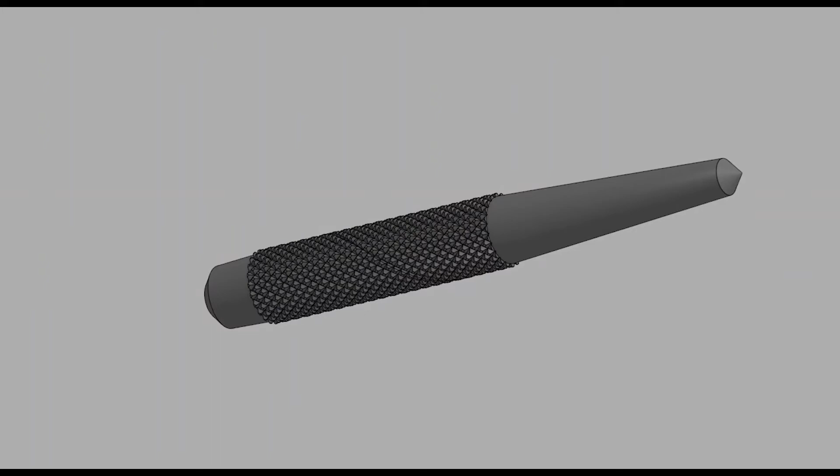In this tutorial, we're going to draw the main component of our center punch using surface modeling. All right, so let's just sign into Onshape, making sure you're using your education email. And the first thing we're going to do is create a new document.

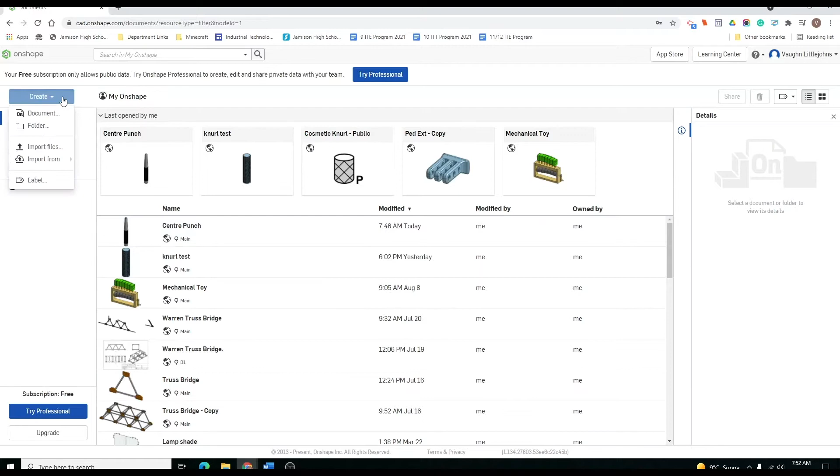So as you can see, I've got all my existing designs here. I want to go up to the top left, click this create document, and then name it center punch, create public document. Now this is our workplace surface, so where we're going to do our drawing. What we've got to do first is just double check our dimensions are set to metric.

So go up to the three lines up the top here, left click it, go to workspace units, and then double check that this is set to millimeters. And the rest is as follows, just like this. Once you're done, click the green tick and we're ready to go.

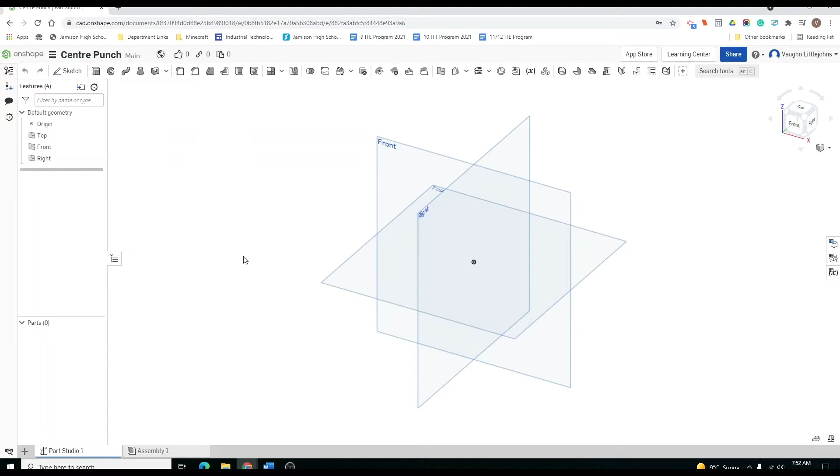So first thing is we're going to select the front view or front plane. So click that, go up to the top here and click the front view. So that just spins your camera around so you can see nice and clearly. First thing is you're going to click sketch. We're going to name this. Our first thing is we're going to create the profile of our center punch. So click the little pencil icon and I'm just going to say profile sketch.

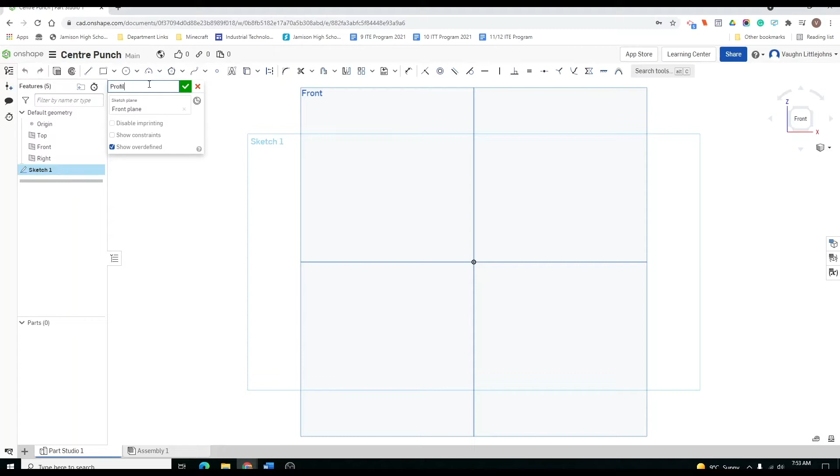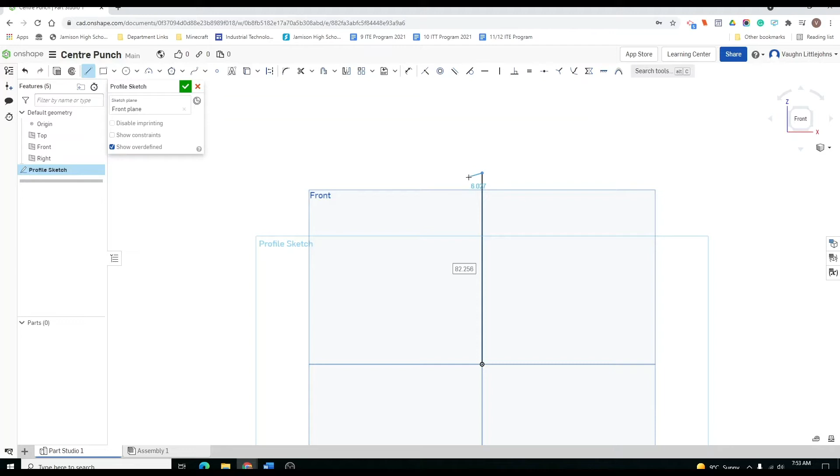All right, so next, click the line tool. We want to select the origin. So the origin is the center of these lines and center of your axis. And then I'm just going to go straight up and I'm going to type in 100. Now you don't have to click anything, you just type. As you can see, there's a little white box and it just automatically selects that. And then I'm going to hit escape. And as you can see, we've got our first line.

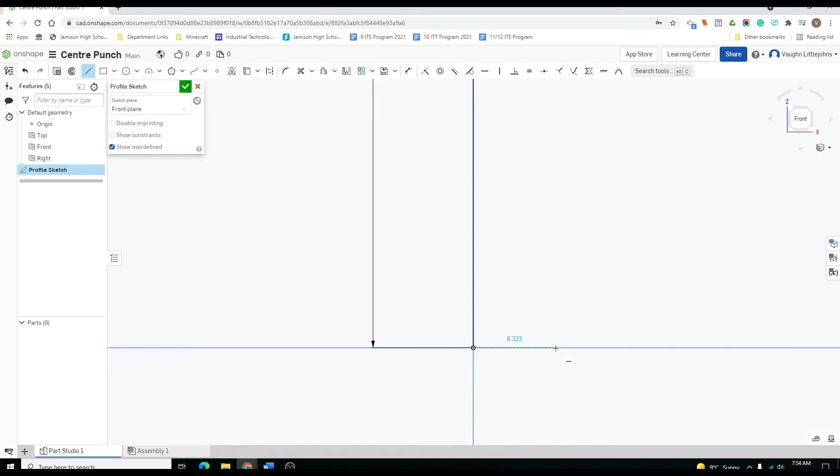So we're going to continue this. We're going to go down to the bottom here and we're going to just draw the next line. So zoom in, use your jog wheel. So that's the center wheel on your mouse. You can zoom into that point and click it once, drag along. When it's dotted, you can see that line is dotted, it means it's coming out at a 90-degree angle or it's dead straight. So we're going to click that and we're going to type in 5.

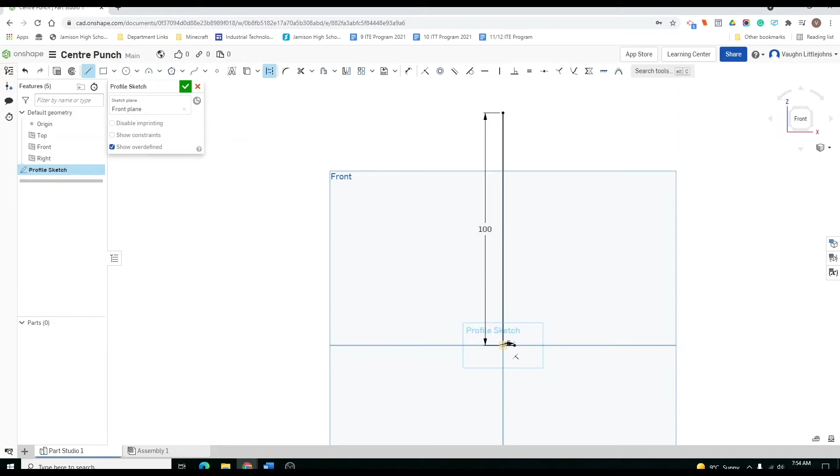All right, next we're going to put in a series of construction lines. So we're going to essentially draw the right-hand profile of our center punch. To start with, we're going to use the construction lines. Click the line, left click, and then click construction. So left click that as well. Go down to our bottom at that origin point, click up, and then you can't really see it, but there we go. I'll zoom in so you can see the numbers. We want to just type in 10. So that should be 10 millimeters up and you'll see a little dot.

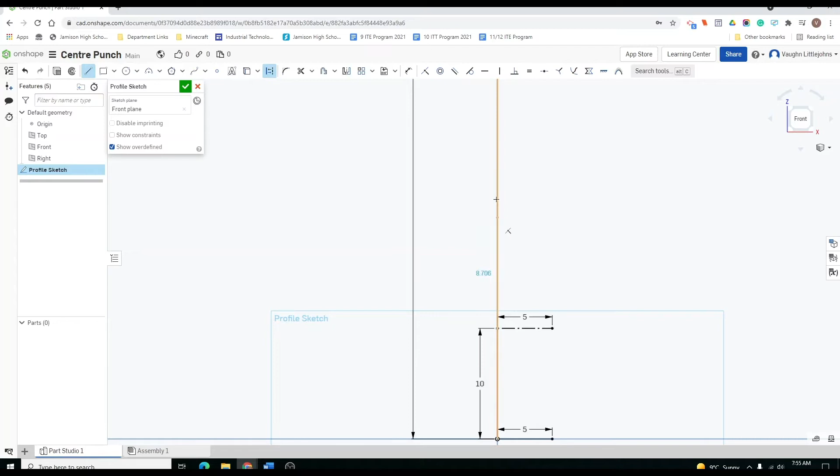What we want to do then is just go out to our right, 5. And I've just typed in 5, hit enter. I'm not clicking anything, I'm just typing away. Now I've just hit escape to deselect that line. The next thing we want to do is continue the construction line going straight up the center. So click line, left click construction. And then we're going to go from that 10 mil mark up.

Now, if you want to move your screen up like this, just click and hold your jog wheel in on your mouse. So we're going to come up directly on that line and we're going to click once and then type in 45 and hit enter. And as you can see, we've got our couple of dots just here.

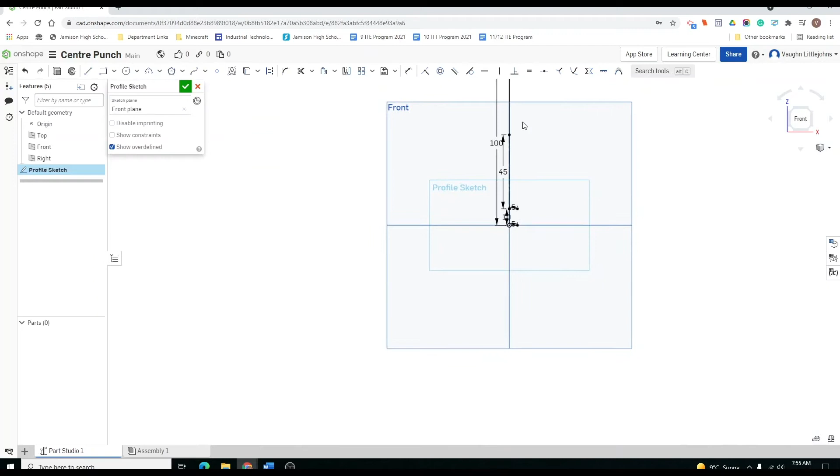And then the next one, we're going to zoom out, move our screen. So click and hold your jog wheel, zoom in, and then we're going to come down from there 3 millimeters using a construction line again. So select line, construction, click that dot, click again, and then just type in 3.

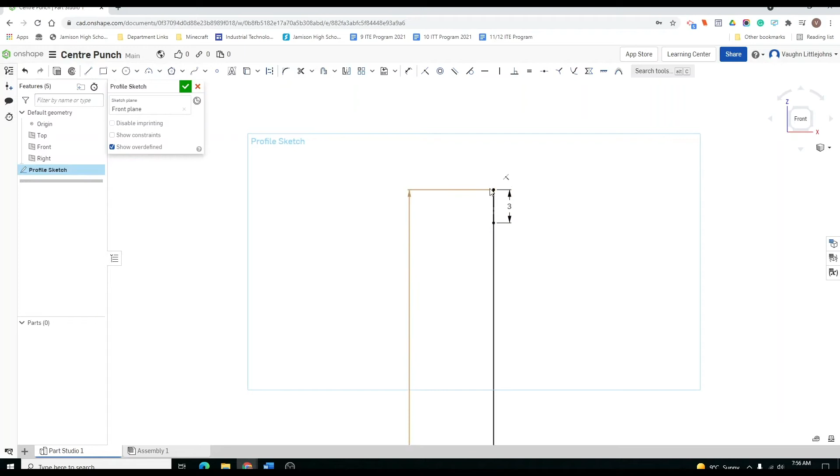Now we're going to have a 45-degree point. So the easiest way to make a 45-degree is just going out 3 millimeters off to our right. So click line and construction again. From that dot we just created, go straight across and type in 3. And there we go.

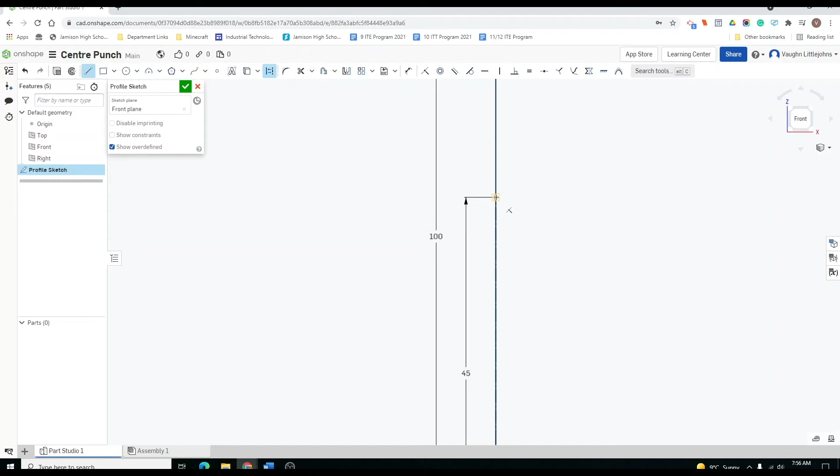All right, so now coming down to this line just here, what we're going to do is create a few lines within this. So construction or line construction, or you can go the other way, it doesn't really matter, as long as the 2 buttons are selected. From this mark here, which is the 45, click across, and the first one we're going to do is 6, because our total thickness is 12. So we're going to have a 6mm diameter because this is going to be round.

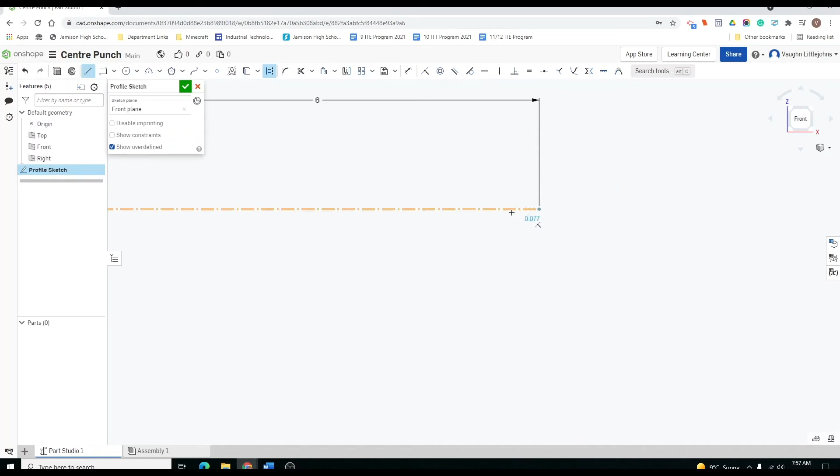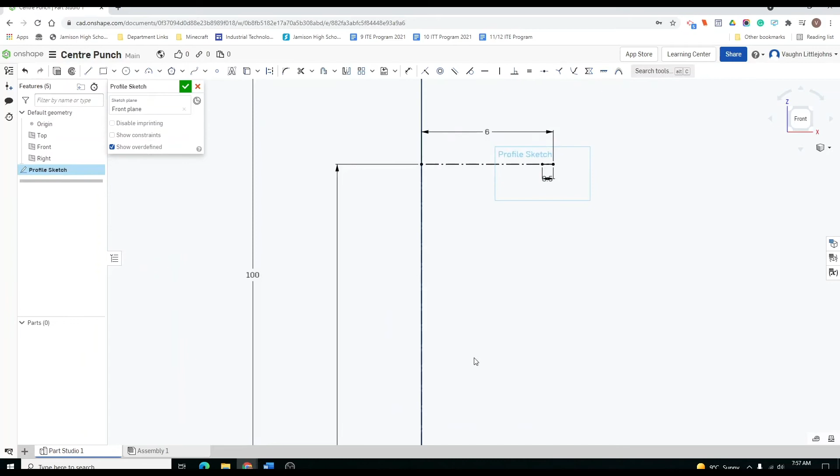Then from that point, as you can see, my line is still continuing. I'm just going to go back down that direction and type in 0.5mm. So that's just going to be a little lip on our actual profile. If you wanted to move these construction lines or the dimensions out of the way, you can just click and drag them so they're clearly visible. Click and hold your jog wheel until you can move and reorientate until we can come down to this line.

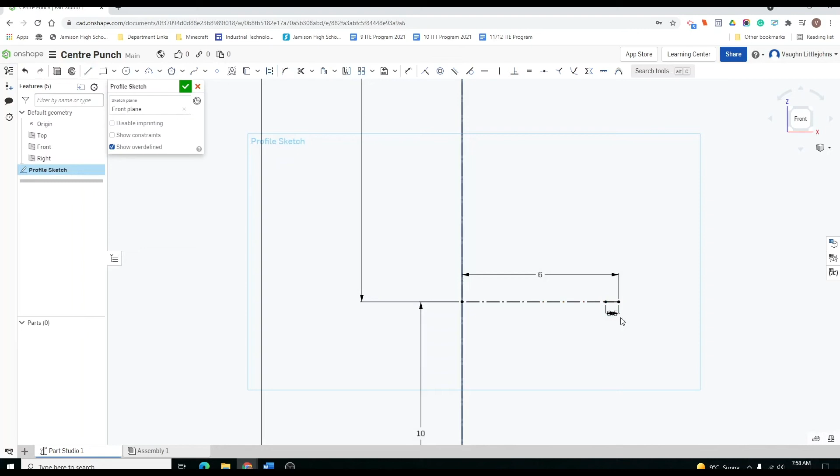Now, I've actually made a mistake on this. I want that to be 6 as well. So I'm going to double click that dimension and just type in 6. And that just extends it out. And we're going to do the same for this line as we did the previous one. The line tool, construction, and come back 0.5mm. So 0.5, enter. Hit escape to deselect that line. I'll move that out of the way. And now we've got all our dimensions ready to go to draw the profile.

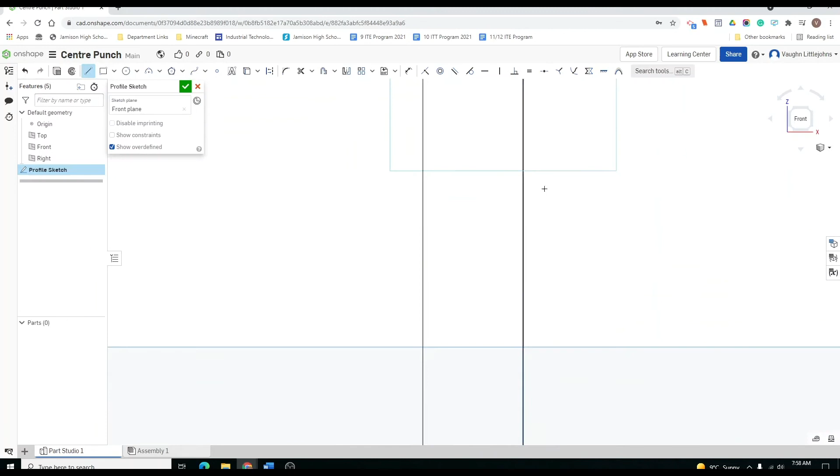So this is where we're just going to select the line tool and connect the dots. This is called surface modeling, where you create a single profile or a surface and then you extrude that out to make a shape. So from this dot here, the 0.5mm one, zoom out, drag your mouse until you can connect that dot. Then we're going to zoom in and drag that across so that's now a solid line.

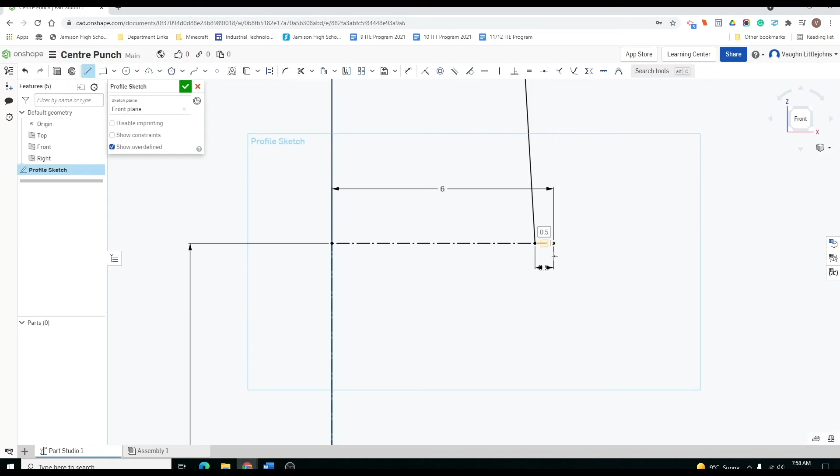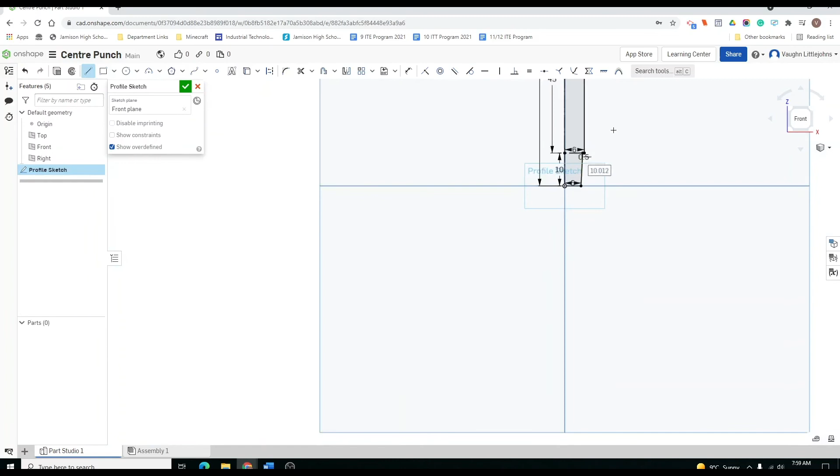And then from that outside dot as well, all the way down to our outside here, connect these two. And the last one is going from that to that. As you can see, it's created a solid shape. It's all shaded in. We've finished with that sketch, so we're going to hit the green tick button. There it is. We could go in and clean this up and delete these construction lines, but there's no need. They don't actually come out when we do the next part, a revolve.

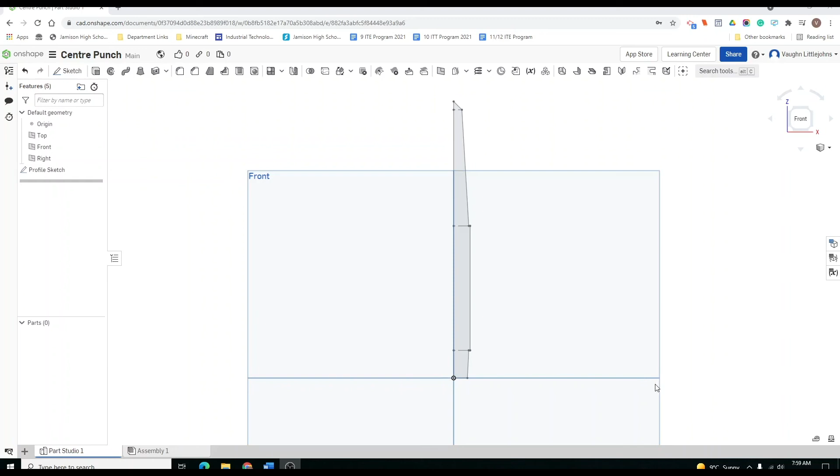The next part is to turn this into a 3D object using the revolve function. So again, this is surface modeling. We've drawn a 2D surface and I'm going to turn it into 3D. Up here, you'll see a button that says revolve. If you hover above it for long enough, it actually tells you how to complete that step. So we're going to click it and have a look at what it says, faces and sketches that we want.

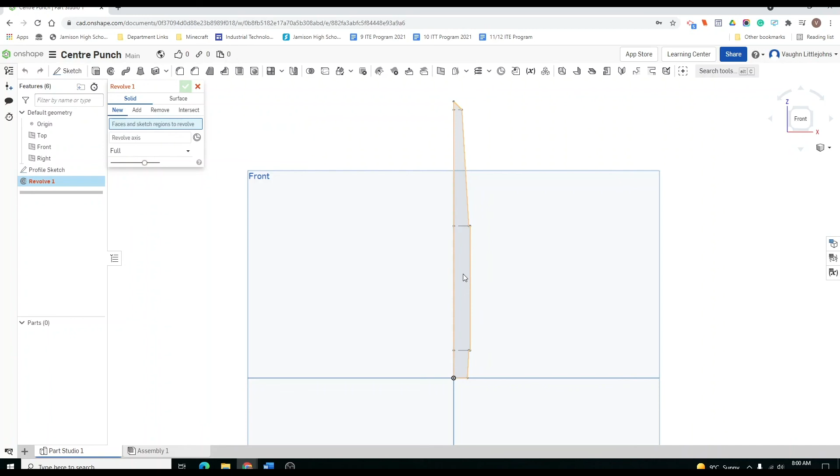So I'm just going to select the gray surface just here, that entire thing. Then I'm going to click revolve axis and select that center line, because that's the point I want this thing to revolve on. Once I click that, as you can see, it's turned it into a 3D shape. To move your camera like this, just hold in your right mouse button and spin around until you get all your different angles.

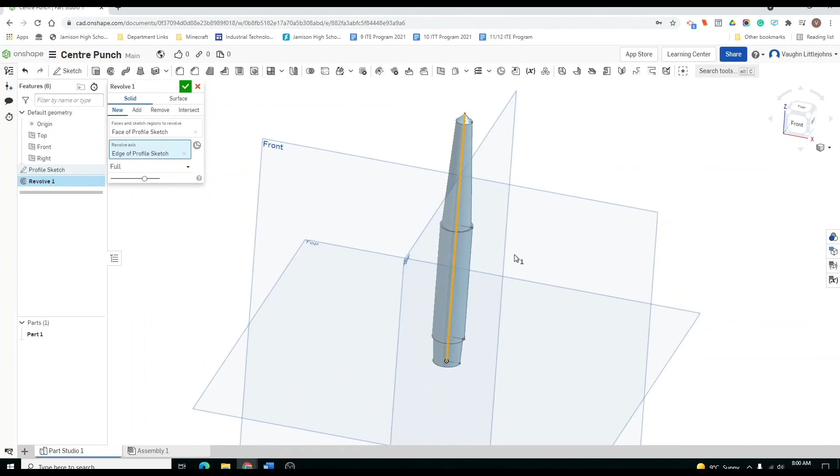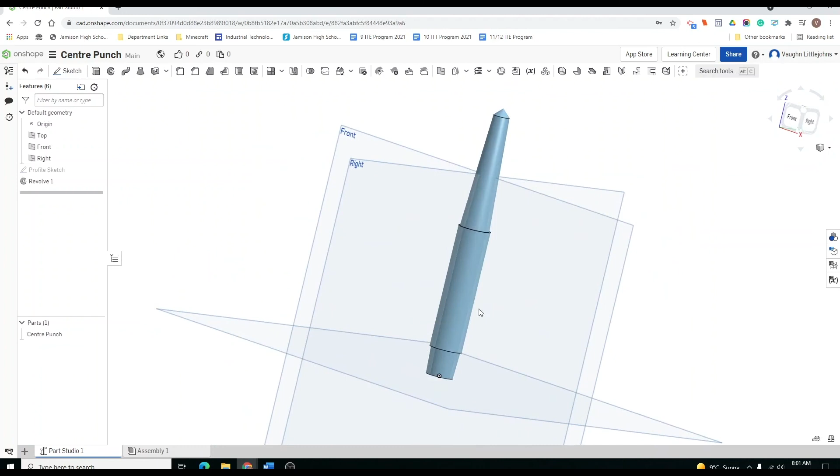So that's basically your center punch. We just now need to put the knurling on it. So click the green tick. We're going to rename that: right click, rename Centre Punch, just so it's clear exactly what we're looking at. As you can see, we looked at our profile and then we revolved it, so we can zoom in and see our little lips and our step downs, and we've got our 45-degree angle just there.